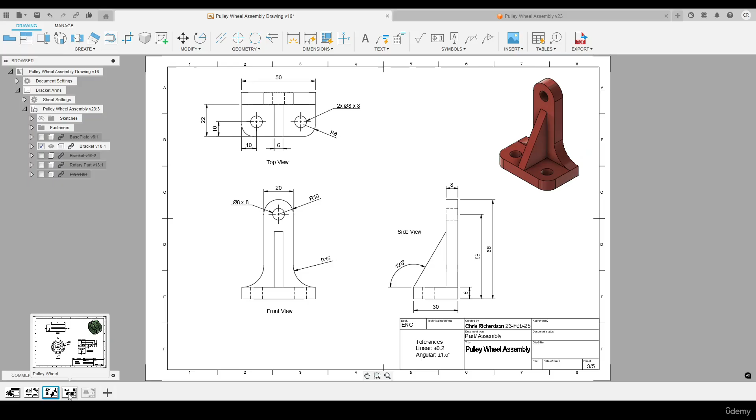On the third page we have the bracket arms, so 2 of these in total within the assembly. On the fourth page we have the pulley wheel itself. We've also got a cross-sectional view, titled AA, referring to the base view here, section AA. On the fifth page we have the pin, a nice and simple drawing for us there.

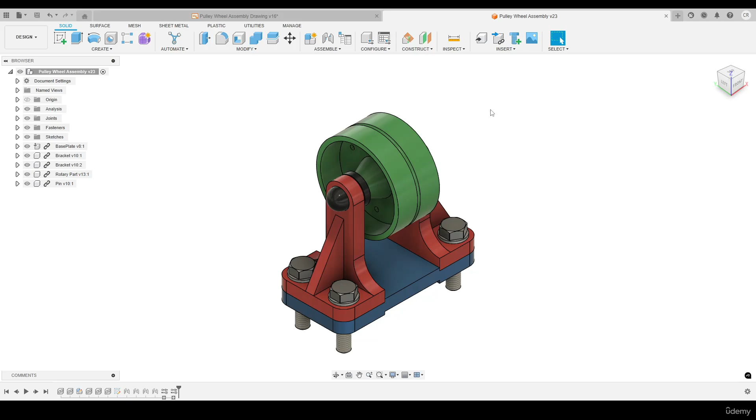So let's go through step by step and create this entire drawing. First of all, let's open up the assembly itself. Then from here, let's come over to the environments, hit the drop down, go down to drawing, and select from design.

In our toolbox here, I want to make sure we're under manual. Keep the contents as full assembly. We will include the fasteners as well. Drawing, create new, template from scratch. I'm going to do an ISO drawing in this case. Units, millimeters, sheet size A3, and I'm going to do this in the landscape orientation for each page. Click OK.

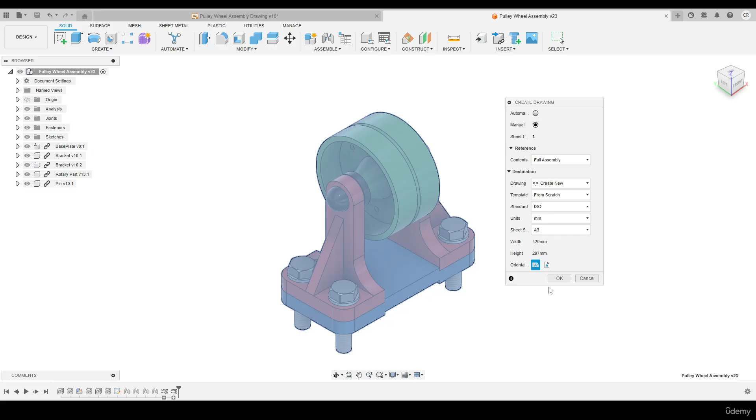Let's start by inputting a base view. On our first sheet we'll have the full assembly, so for this I want to use an ISO view. I'm going to change the orientation here, do this NE isometric. I think that's the correct view. Yeah, that's the correct view.

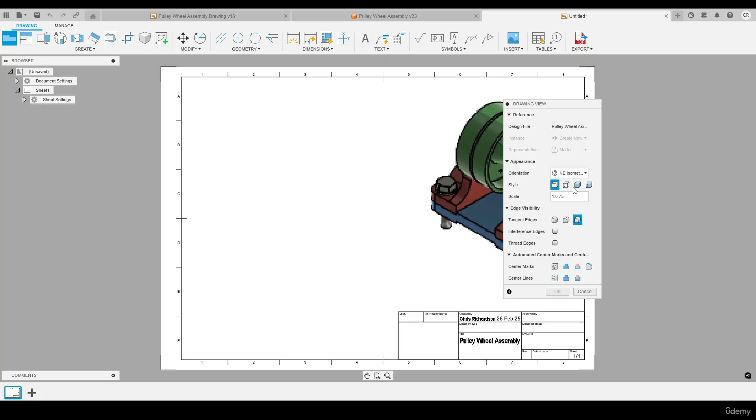Just need to bump up that scale. Let's try 0.75, I think that's a good size for this sheet. I'm also going to change the style to shaded as well. Okay, I'm going to place that there, press OK.

That's looking nice. Now let's add a parts list. Come up to tables, and I'm just going to hit table. In terms of type, make sure parts list is selected, leave everything else as default. I'll drop that in there.

I want to do some edits to this one. Let's double click on this, and we're going to insert the description. That's in the right location. I'm going to change the font of this.

Come into document settings, under our font. Let's change this to, let's go for Arial. It's OK, it's looking better. Move this over here slightly.

I'm just going to change the size of these columns, so I left click once, I'm going to pull out the material.

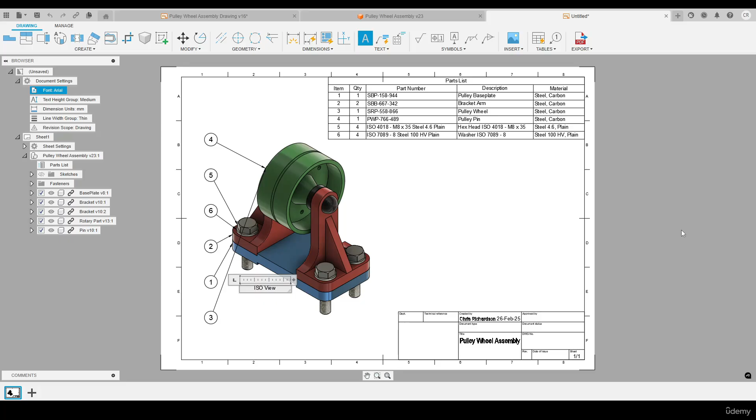And then let's drop that into the corner, so I'm going to choose the arrow point here, snap onto the corner. That's looking good. Let's hit T on the keyboard, let's title this view, let's go for ISO view, center that, press close, sure position's okay, and now let's adjust these balloons.

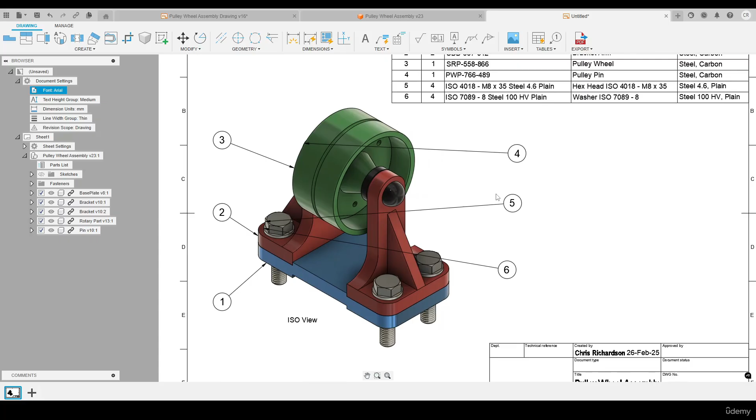Now in order to align these balloons vertically, we pull out this one for example. If we then pull out the 2 and bring that near to the 1, it will snap to the 1. And if we bring that up, we can see we've got that alignment there. I'm going to do the same process for balloon number 3 as well. Okay, something like that there. They're nicely aligned. Let's do the same for the other side and tidy this up.

That's looking good, quite happy with that. Let's put in the general tolerances. In terms of the title block, I'll be using the generic one associated with the ISO standard, but when creating the drawing, feel free to use your own.

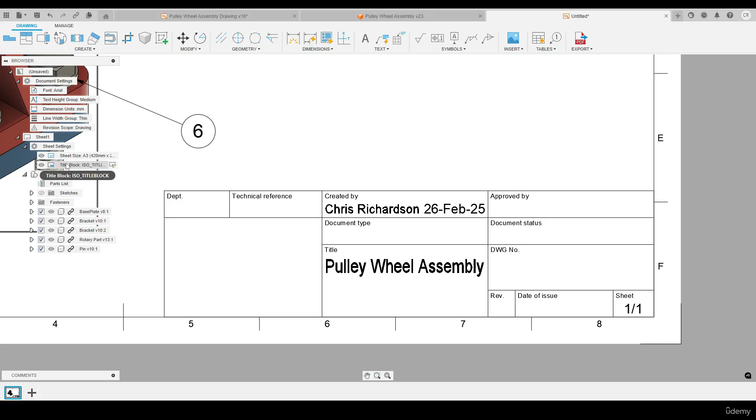So I'm going to come over to the sheet settings, hit the drop down, right click on the title block, and select edit title block. Let's click OK. Press T on the keyboard, insert a text box like so. Okay, so a linear tolerance plus or minus 0.2 mil, and angular tolerance plus or minus 1.5 degrees. Let's finish the title block there.

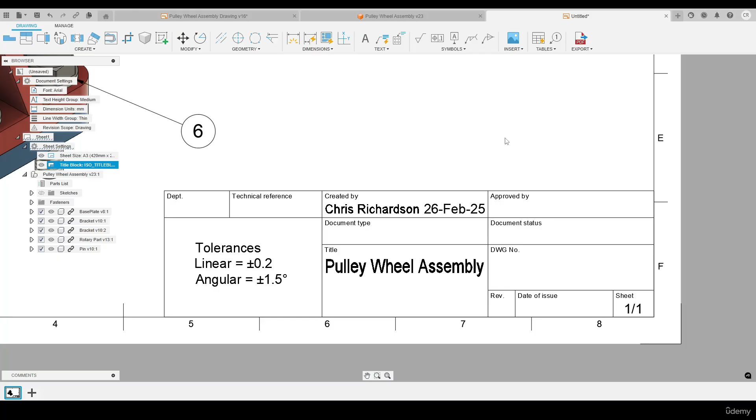And we can later apply that to all of the other sheets as well. Double click the middle mouse button. And let's go ahead and create the remaining sheets. So we've got 5 in total, so we're going to add 4. 1, 2, 3, 4. And let's come back to the second sheet, which is our base plate.

So you can right click on these and rename them. So I rename this base plate example. I'll do the same for the others as well. Assembly.

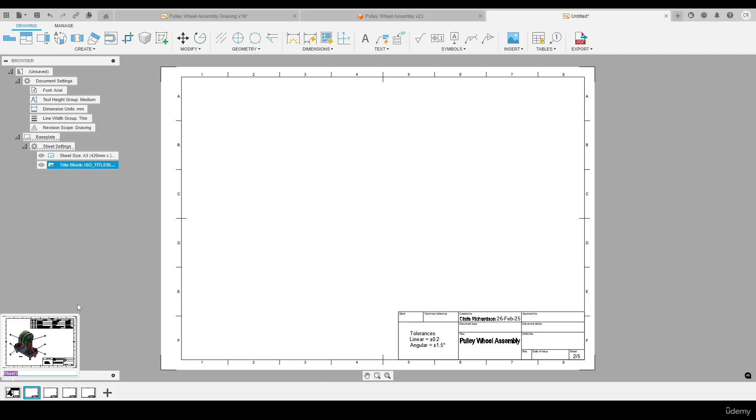Let's come under the base view. Up here, click base view. We want this to be the front view. I'm going to bump up that scale to 0.75. Left click once there and press OK.

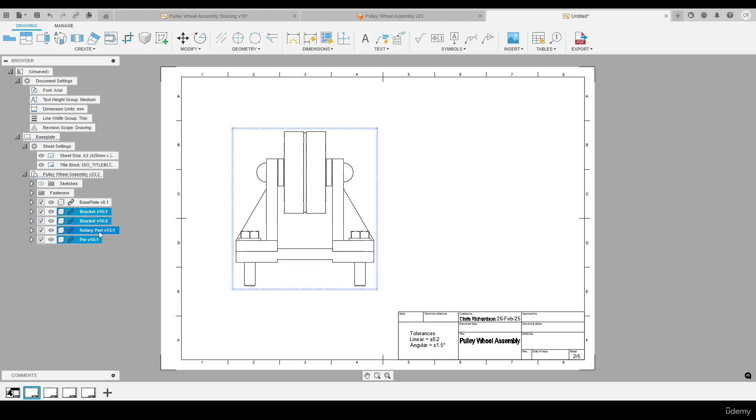We only want to be showing the base plate. Let's come over to our browser where we have the pulley wheel assembly. We want the base plate showing, but the bracket, I'm going to select that, hold down shift and select the pin. That will select all of them. Right click, suppress those. Same process for the fasteners: left click one, hold down shift, left click the last one, right click, suppress.

And we're just left with the base plate. Press P on the keyboard, do a projection. Let's project this view, do a top view, a side view, and an ISO view as well. ISO, let's make that shaded.

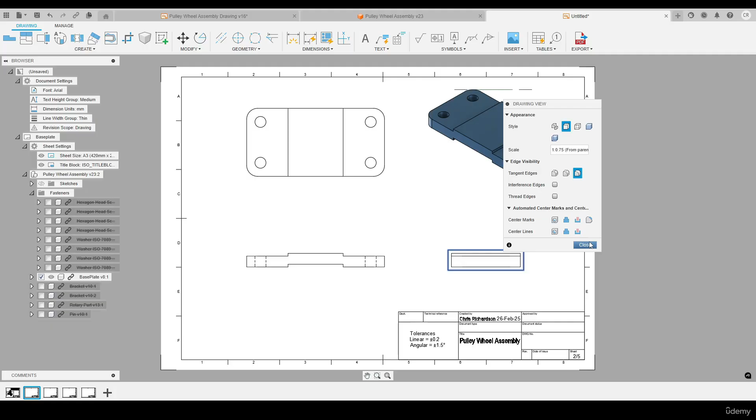For the front view, I feel it would add value to clarify that these holes here are through holes, so let's show the hidden dimensions. Press close. Now this side view relates to the base view, but I don't want to show hidden dimensions there—they don't add much value. So I just go visible edges only. Press close. That's looking good.

I'm going to title these views up. And now let's start adding some dimensions.

Let's hit D on the keyboard. Let's do the side view first, so this will go with the overall height. Let's go from this point here to this point here—our 10 mil. Let's come over to the base view and start defining these depths of the cutouts.

Select this point here and this one, place that in there, 2. I'm just going to reposition that—left click once, hold down on this pointer, drop that there, move the base view slightly.

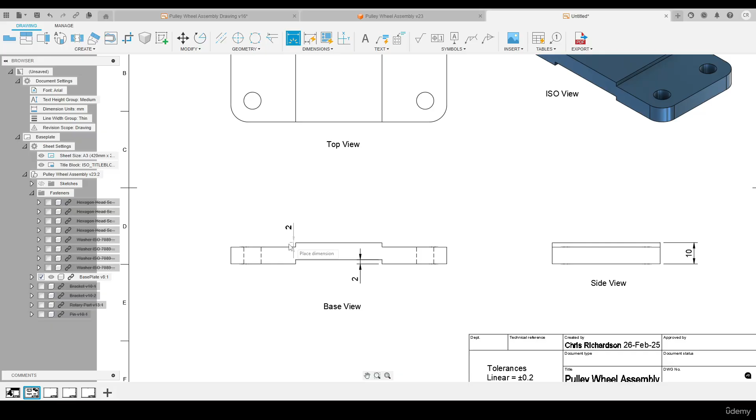Press D on the keyboard again, and from this height to this height to define this depression. I'm going to bring this out there. Right click OK, that's good. Double click the middle mouse button.

On this view here, we want to identify center marks for our holes. Let's double click on them. Under center marks, select hole, click close.

Let's press D on the keyboard and give this a height, from this point here to this point. This one has a tolerance that differs from the general tolerance, so we'll handle that in a second.

Still in the dimension tool, let's give the overall width of this—this point to this point—and we're going to bring this up here.

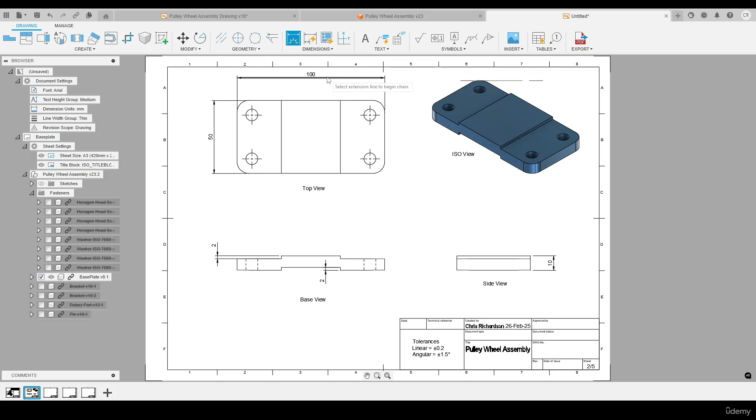Then we'll add a few other horizontal dimensions as well. Let's again refer to this point, and go to the center point of this hole here, like so. Bring that up there, just move the mouse 10. Again, this point here to the point of this base, bring that up, let's go 30.

And this point here to the point of this boss, bring that up 70, and bring that 100 up as well. Bring that top view down slightly, and let's also add the other details.

In terms of this hole, press D on the keyboard. We'll go center point to the top vertical, and put in that dimension there, 10.

We also need to identify these holes here. Now we don't want to apply a dimension here, but rather a note. So hit escape, press N on the keyboard, select the hole here and bring that leader out. Left click once, press OK. We've got our identification here: 4 holes, diameter 8 through, simple, no thread.

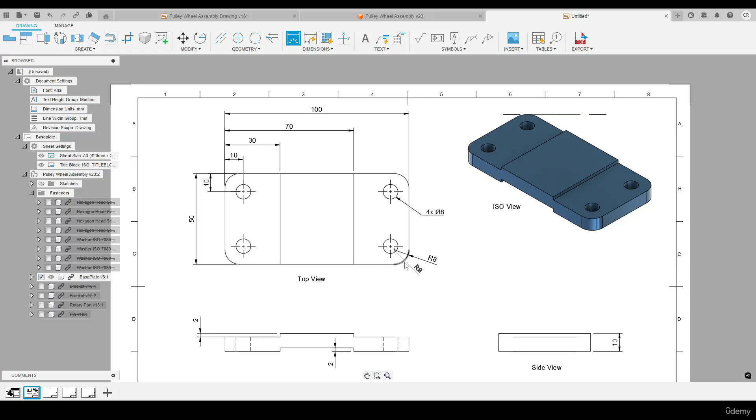And then let's give this fillet a radius as well. Hit D on the keyboard, select the radius. Fusion will pick up that we want to define a radius here, just judging by the fillet. Looking good. Let's double click the middle mouse button.

We have our general tolerances down here in our title block, like we added from the first sheet. Now we just need to add the tolerance specific for the height, in this case 50 mil. Let's double click on that, select tolerance, and go with a symmetric tolerance of plus or minus 0.15, click close. Got that tolerance display there, that's good.

And there we have the sheet for the base plate—feel free again to adjust the title block if you're using the default ISO one.

Before we continue, let's make sure we hit save, and just double check the location—that's in my project file under 'while creating assemblies', which is the location of the pulley wheel itself. Let's click save, and now let's move on to the bracket arms.

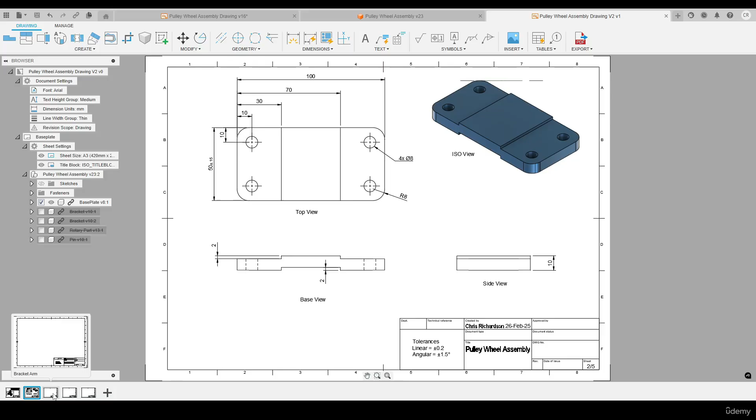So we'll select that sheet. Again, let's go base view. For the front view, I'd like this to be either from the right or the left, and let's go with the right. I'm going to bump that scale up as well, 0.75—actually, no, let's drop that down to 0.1. I'm going to drop that in there.

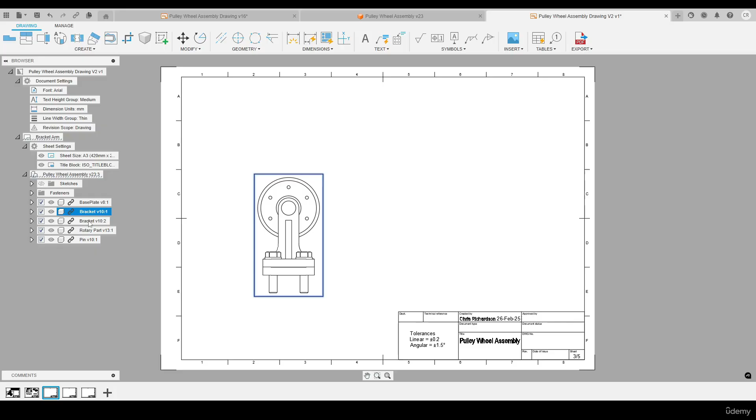Press OK. Let's suppress the parts we don't need—we want to keep the front bracket, which is this one. We'll select the others, right click, suppress. And let's do the same for the fasteners: left click once, hold down shift, left click, right click, suppress.

Then let's project some views. Hit P on the keyboard, select this view. Let's do a top view, a side view, and an ISO view as well. Might actually change that scale again—sorry, let's see how it looks on 0.75. I think that's okay.

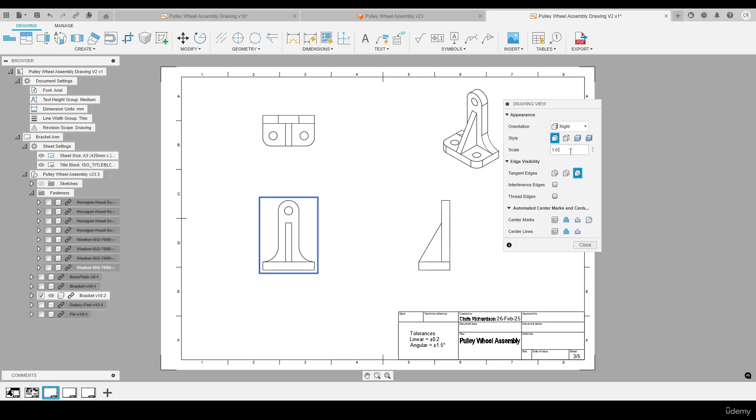Let's go with that, this in the corner. Let's go for a shaded appearance on that. Click close.

Let's also show the hidden lines on this drawing, showing they are through holes. We can likewise see them on the side view and also for the hole at the top as well. Let's double click this view.

Let's have our center marks turned on for the hole features, and the same process for the top view as well. Turn the center marks on, close. That's good. I'm going to title up these views.

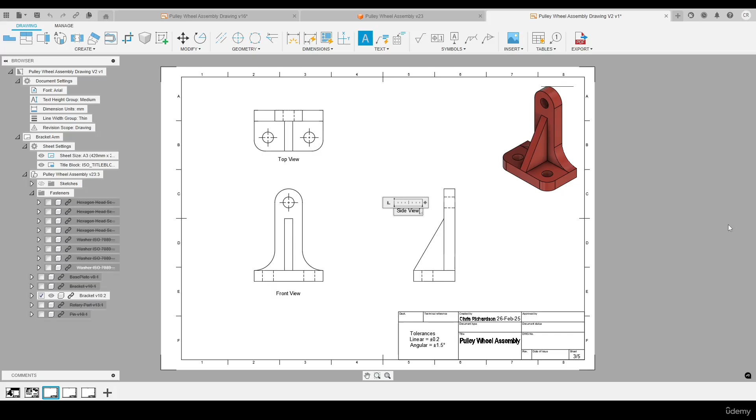Okay, let's start on the front view then. Hit D on the keyboard. Let's first of all dimension up this radius here, 15. I'm going to bring that dimension out slightly, left click once, draw that out like so. Hit D on the keyboard.

Let's go for the width then, from this point here to this point. Got our 20 in there. Let's also go for the radii here, so 10. I'm going to bring that out slightly.

And then as this is a hole feature, let's hit N on the keyboard, put in a note for this hole here, bring out the leader, right click, diameter 8, and it's a through hole in this case, or 8 mil, which is the thickness of this body here.

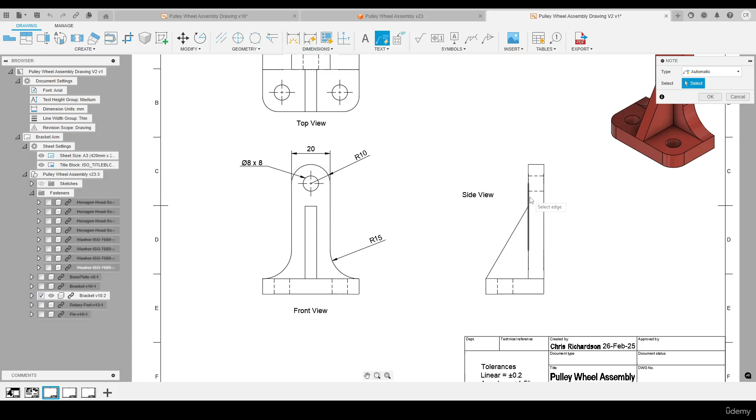Let's move over to the side view. Let's hit D on the keyboard and define the depth, from this point to this one, drop that dimension in there, and then a few vertical dimensions. So I'm going to dimension this side here, 8. Also the dimension here to the center point of this hole here, let's go 58. And also this point here to the very top as well, 68.

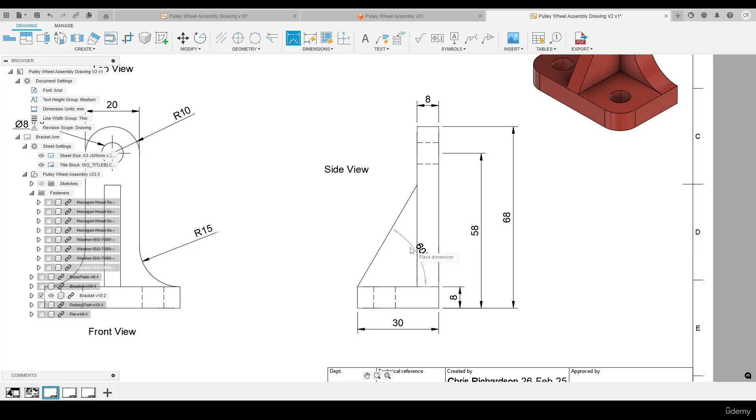Let's also give the dimension as well for the width of this, so 8 mil, point to point. Looks good. Then let's define an angle here, from this line to this line. We could define it on the inside there, but it does conflict onto the model itself, and it's generally advised to keep dimensions outside of the part. So I'm going to go with 120 there. Then we can easily recognize that it's just a 60 degree remaining to make up the 180, giving us this angle here. Double click the middle mouse button.

Now let's work on the top view. I'm going to adjust the front and the side view slightly. Okay, give the top view some more space. Hit D on the keyboard then and go for the width, so this point to this point, about 50 mil in there.

We've already defined this thickness here as 8 mil, so that's on the drawing there. We just need to go from this point to this point here and define this. So we got our 22 there, and then let's do the holes. So center point, let's also reference this point, 10 mil. And from this point here to the center point, we should have another 10.

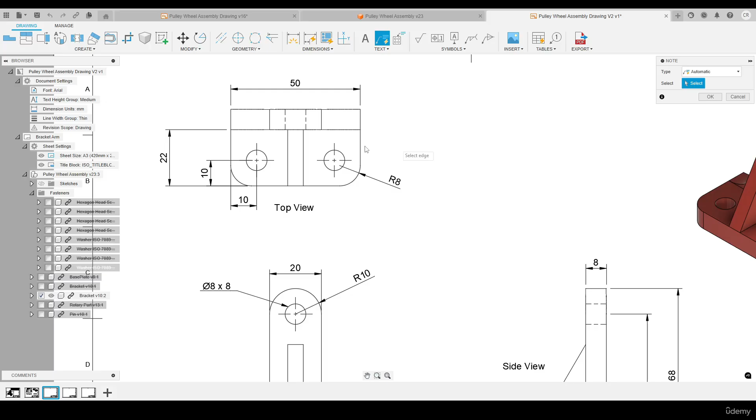Let's give this fillet a radius, 8 mil there, and then for the holes, we're going to use note. So press N on the keyboard, select the hole, bring the leader out, 2 holes, both diameter 8, and they're both through, or 8 mil thickness, which is what we've defined down here. Double left click the middle mouse button.

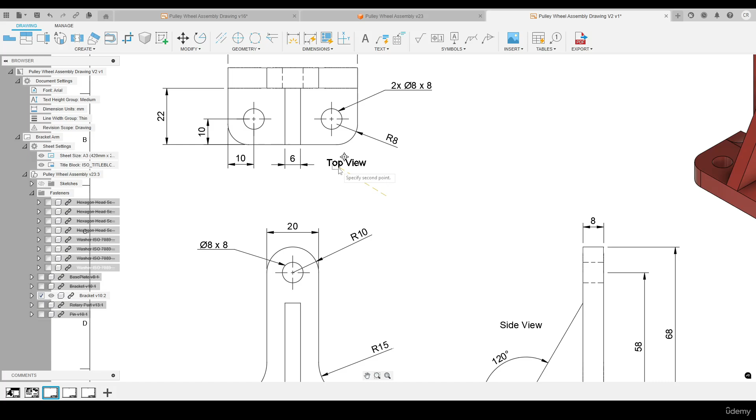And just one more dimension that we need to add is the thickness of the rib. Remove this top view out of the way, let's move that over here. Hit D on the keyboard, point to point, 6 mil. Put that identification back, somewhere there. Double click the middle mouse button.

That's looking good, quite happy with that. I adjust the base slightly. There we go. Let's hit save.

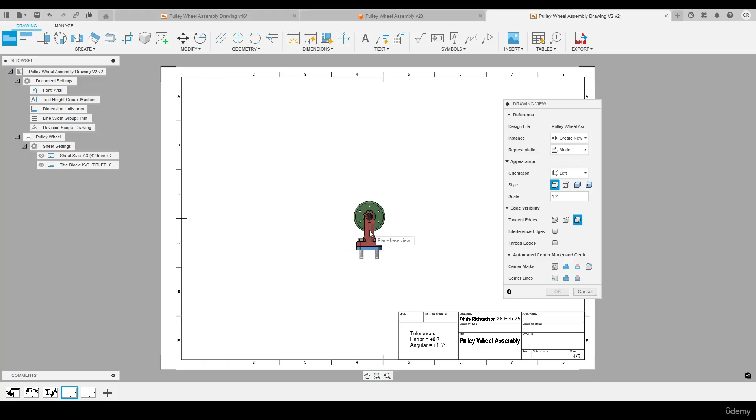And let's move on now to the fourth page, which is the pulley wheel. It's the same process. Let's do a base view. And I'm going to flip the orientation of the base view to, let's take a look at the left orientation. That's looking good. And again, let's bump that scale up, try 0.75 again, this should be okay. I'm going to left click once.

Okay, and then suppress those parts I don't need. Same process, I'm going to hold down Control, select the parts we don't want to show, right click, suppress. And same for the fasteners as well, hold down Shift, right click, and suppress.

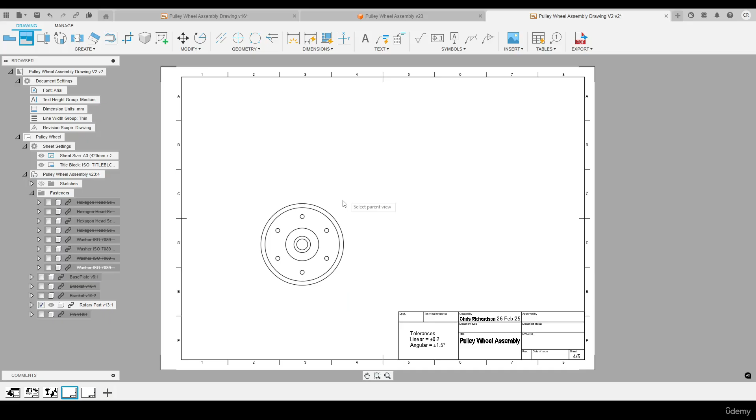Let's now do some projections. Hit P on the keyboard, select the base view, move up to the top, let's get a top view in there. Let's also get an ISO view in there as well. Green tick. Let's add the cross section as well.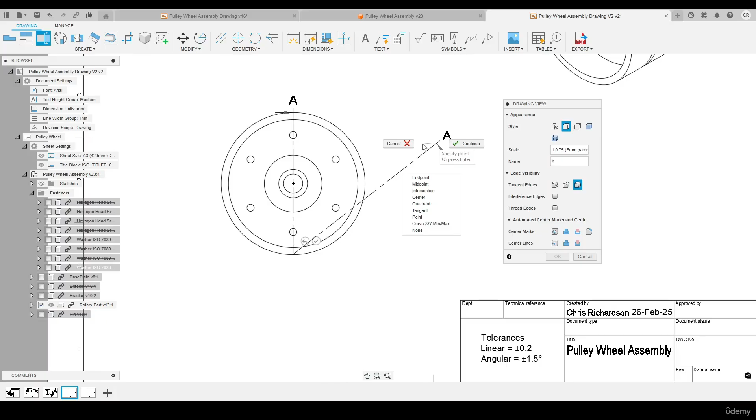Come into the section view. First of all, select the base view as being our parent view. In terms of points, I want to select the very top quadrant and the very lower one here. Okay, I'm going to right click, continue. Let's put that view just to the side here.

Okay, and I'm just going to move these arrowheads. I don't like them so much conflicting with the part itself. So hold down on this pointer here, same process for the lower one. Looking nice, move that.

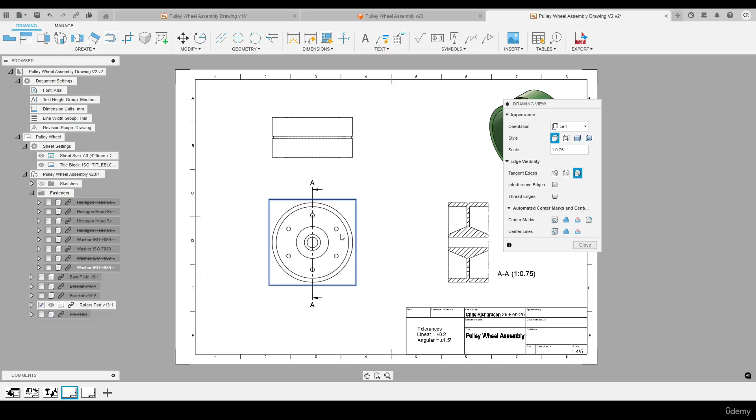Let's take this ISO view in the corner, let's put that on shaded, close. Double click on our base view as well, and let's get these center marks in on all of these holes here. Select that hole, okay, we have our center marks there. That's good.

Let's also put in a center line to define this hole here, so I'm going to use the center line tool under geometry. I'm going to select my first edge here, second edge here. Looks good, got to label these views up. Press T on the keyboard.

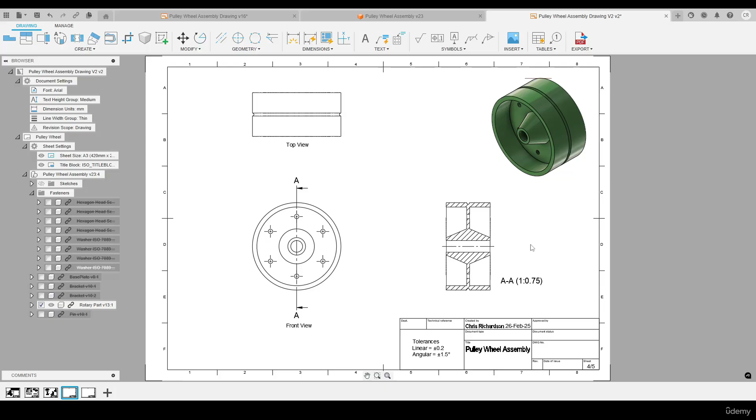And for the cross-section view, that's already labeled up as section AA. Now we can go ahead and start adding some dimensions. Let's do the top view first, fairly straightforward. So D on the keyboard, then we want to come to the center point of this arc here.

Okay, so indicating that groove moving around the pulley. Select this point here, so we know where to sketch that. And then an overall height as well, it should be 30. We'll do an outer diameter, so 60. And then let's radius this arc here.

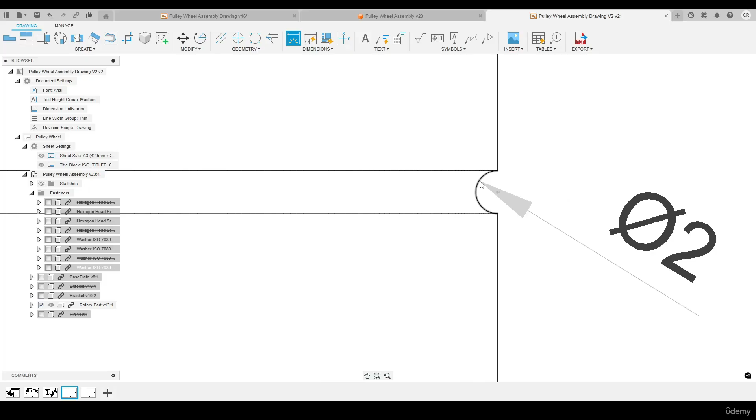As we select this using the dimension tool, Fusion will be using the diameter dimension. However, we want to be using the radius. So in a case like this, we'll go into the dimensions, select the radius dimension, and select that radius there, put in the radius one, double click middle mouse button.

Okay, that looks good. Let's go ahead and define the pitch circle diameter for these holes here. To do this, come under geometry, select the center mark pattern, and we'll select this circle and this one. Happy with that, leave everything as default, press OK. Actually, let's double click on that, and let's also add the center mark as well. This is a through hole here, press OK.

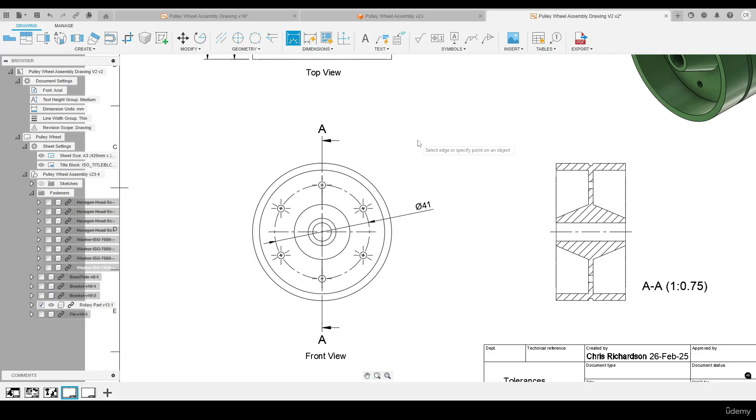Now let's dimension this up. Let's hit D on the keyboard, give the PCD a dimension, so 41. And these holes here, let's hit N on the keyboard. I did these using the hole command. Let's select that edge there, bring that leader out. Okay, so 6 holes in total, 3mm diameter.

And they're all through, as we can see in the cross-sectional view here. Let's also add the center lines there whilst we're at it. Center line, these two, same process, these two. And finally, let's dimension the section view.

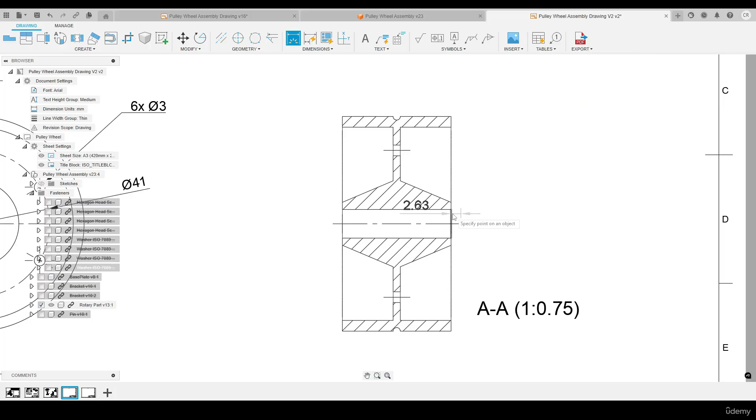So D on the keyboard. We'll start from the center line of the through hole, and we're going to use a series of dimensions working our way up. So dimension there, center line through hole, center line for these holes as well. And the last 2 dimensions will be these guys. So we've got 27, it should be 30. Okay, that looks good. And there we have our completed pulley.

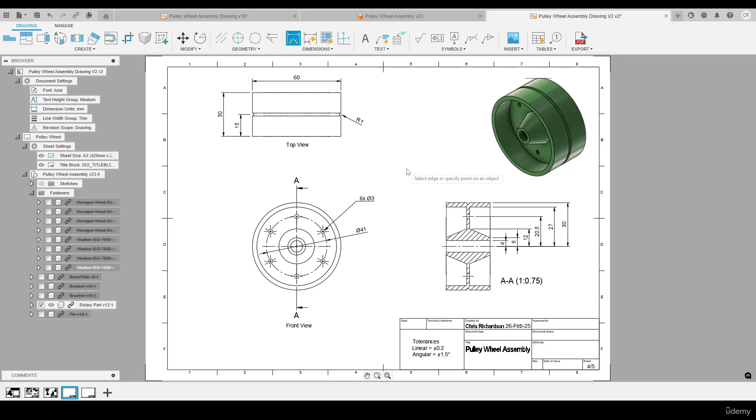And last but certainly not least, we have the pin drawing. So let's come down to our 5th sheet, we'll select that. Let's go ahead and add a base view. And for the base view, I'm going to leave the orientation as front. Put that scale up, let's try 0.75. Yeah, that should be fine, let's click OK.

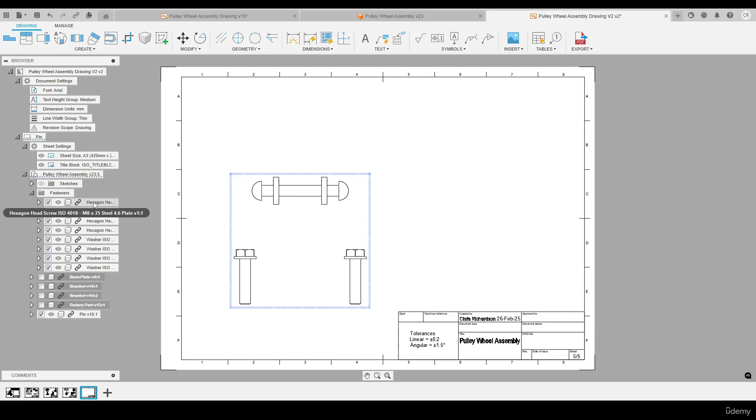And again, let's suppress the parts we don't need. So base plate, the brackets, rotary, right click, suppress. Same process, fasteners, click once, hold down shift, click again, right click, suppress. Just have the pin. Let's do a side view of that, hit P on the keyboard, select the base view, do a side view. Also go for a projected ISO view as well, green tick.

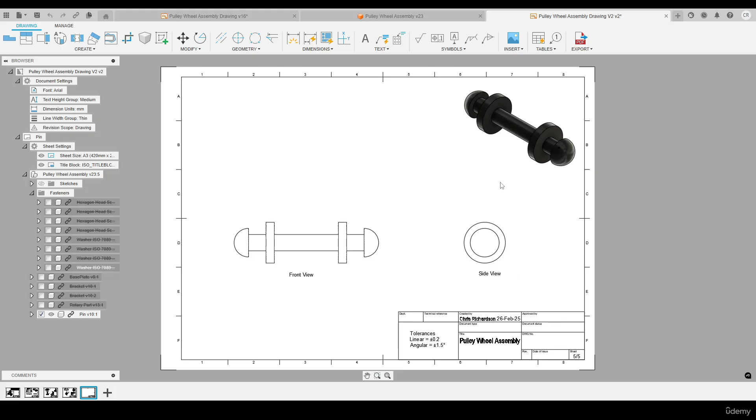I'm going to bump that scale up actually, let's go for 0.5, that's good. Double click on this one, make it shaded. Pull these guys down. I'm going to label these views up. And now let's add some dimensions.

Hit D on the keyboard. I'm going to use this point here as a reference point. Select that point there. Let's go here first. Do this point to this one. Let's also add the thickness of this shaft as well. So this point to this point.

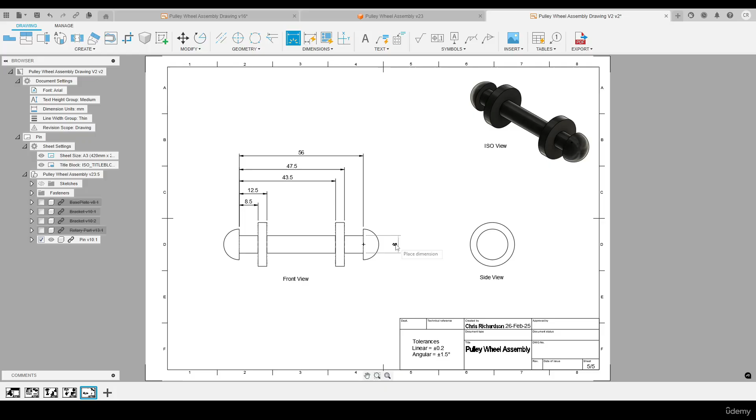And that's for the diameter of this body and also the diameter of the end of the pin. We can do that on the side view. Hit D on the keyboard then. So this one here is this body here, so diameter 20. And this one here is the end of the pin, so diameter 14. And there we have the technical drawing of the pin.

Okay, and lastly, let's export this as a PDF. So let's come up to the top where our tools are. Let's go and export and select export PDF. In terms of sheets, make sure we have all sheets selected. Let's open the PDF as well and keep the line weights turned on. It's okay.

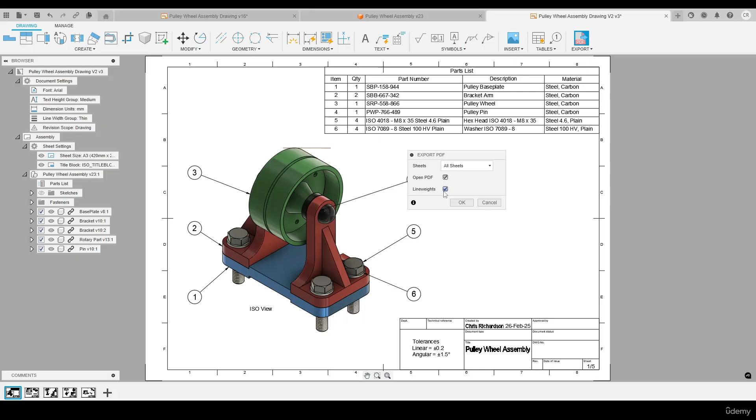And we could save this either into the cloud or on the computer. I'm going to save this locally on my PC. Click save. And there we have the full PDF. So this is our assembly page. We've got our base plate, side brackets, pulley wheel, and the pin.

So as a quick effort, I'm quite happy with that. There are a few things we could do, maybe to tidy this up a bit, but all of the essential information is there. I hope that lecture was helpful, and I'll see you in the next one.